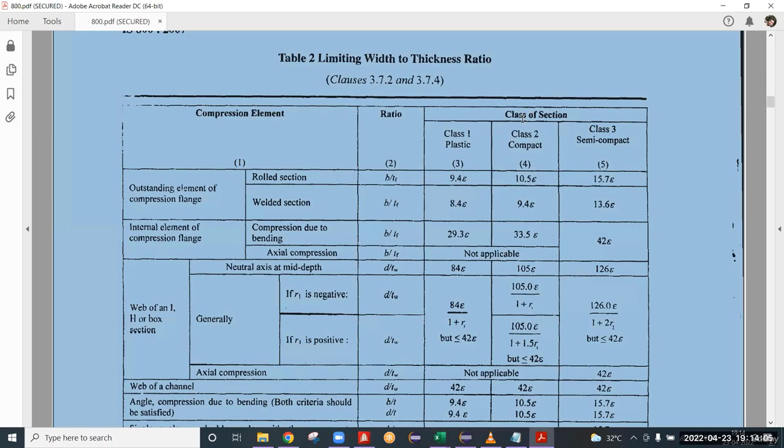My screen is visible to you? Yes, sir. Okay, fine. I am taking a new structure. Just give me a name. Indian code mezzanine frame. Okay.

Last time we discussed and agreed that I'm going to take you through all the different types of structures, that is regular frame, mezzanine frame, crane beam along with frame, flat roof frame, and 3D structures. For each structure I want to use different codes so that all the codes and all the types of structures will be covered.

That is why last time we have seen design using AISC code, and now I am sharing design using IS code, and this frame is with mezzanine. For this purpose, I want to take one example. Okay, fine. Let me take this example. You are seeing my screen, right?

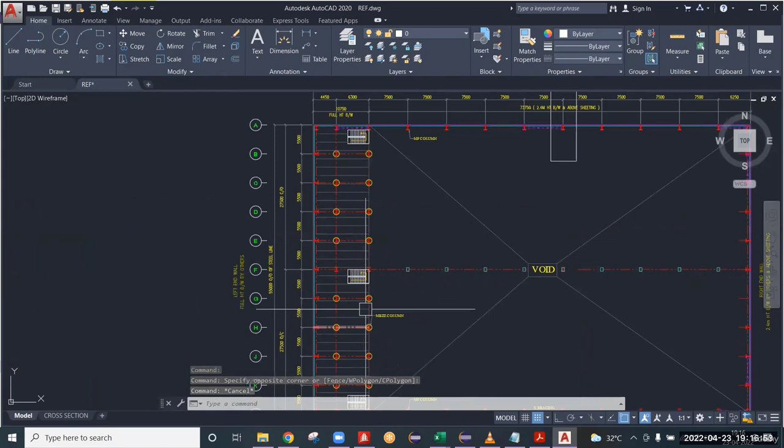Yes, sir. This is the 55-meter wide building and 84.5 meter length building, and I am taking a mezzanine frame. That is why I am taking grid line 2 in order to explain a frame with mezzanine. So can anyone tell, what is the tributary width for grid line 2? My screen is in front of you. It is a simple thing. Try to answer.

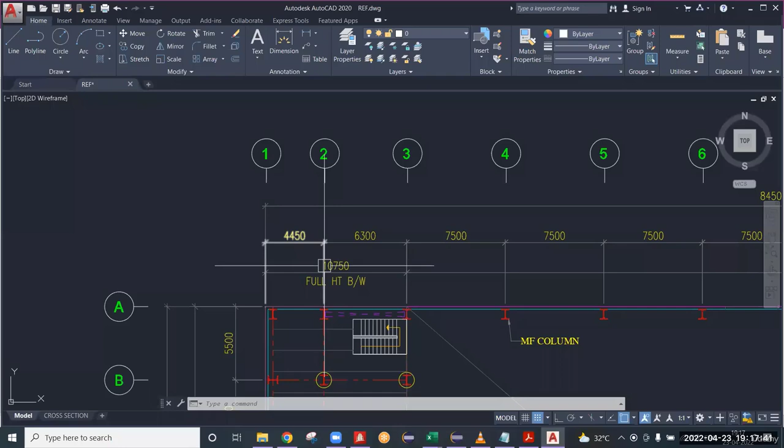So many sessions happened. 6.3. 5.375 meter. 6.3 plus 4.45 divided by 2. 5.375, right? Yes, sir. So make sure to remember this. I am going to take this frame in the design. What is the width here?

55. I just want to assume that the block wall thickness is 200 here, and here also it is 200. So overall 55 meters minus 400 mm block wall, and STAAD will do design along the center line only, right? That is why you have to assume the center line of the column at the base. Suppose the base depth of the column is 300. So what will be the center line? 150. So one side it is 200 plus 150, and the other side also 200 plus 150. Is that clear to all of you?

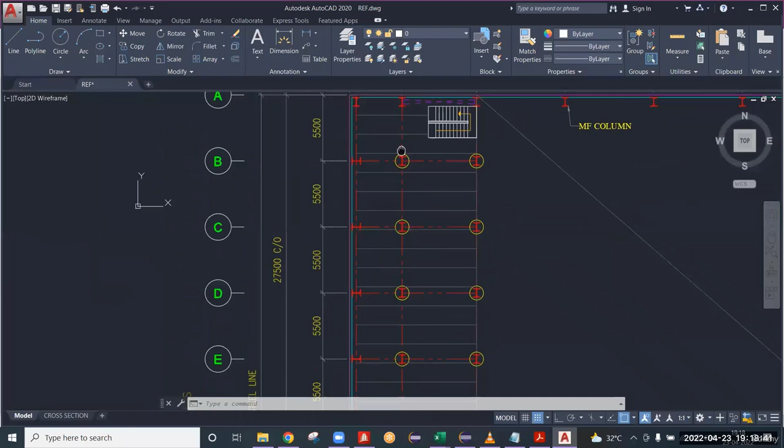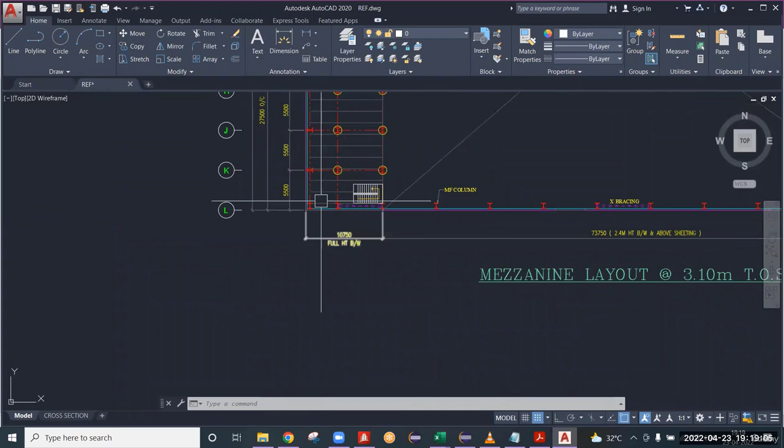I am assuming that my base depth of the column is 300. So what about the center line? It will be passing through the center of the web. So 200 block wall plus 150 center of the column, 350 on one side, and on the other side also 350. So in order to give perfect geometry in STAAD, what do you have to deduct from the actual width? 55 minus 0.7. Do all of you agree with me?

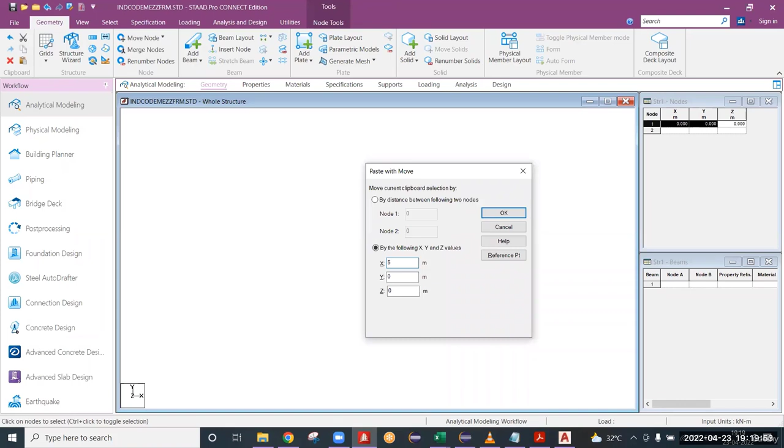Yes, sir. Right. So 55 minus 0.7 gives you 54.3. So I am giving the first node here. Before giving the second node, I am changing the view to front view so it is easily visible. I'm selecting the first node, Control C, Control V. You have to give the X distance for the second node, that is 54.3. So these grids are created, A and L.

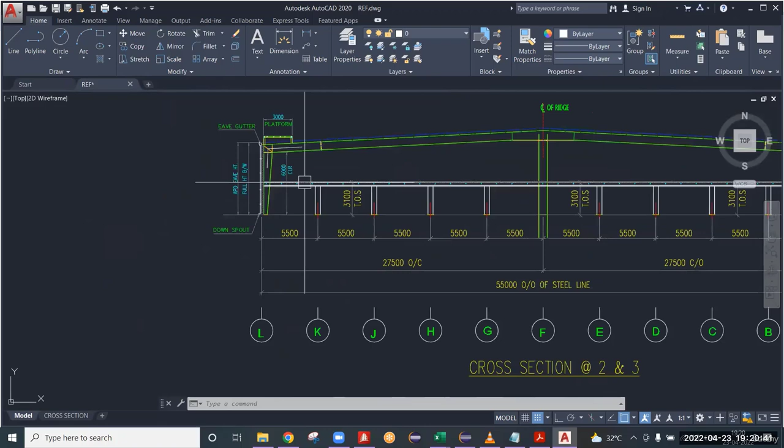Now you have to give the height. What is the height of this building? For example, the customer has given 6 meter clear height. So what is the module? Module means clear span between the columns. So what is the module here? 27.5. Based on that, you have to assume the maximum rafter depth at the haunch portion. Suppose I assumed it as 800.

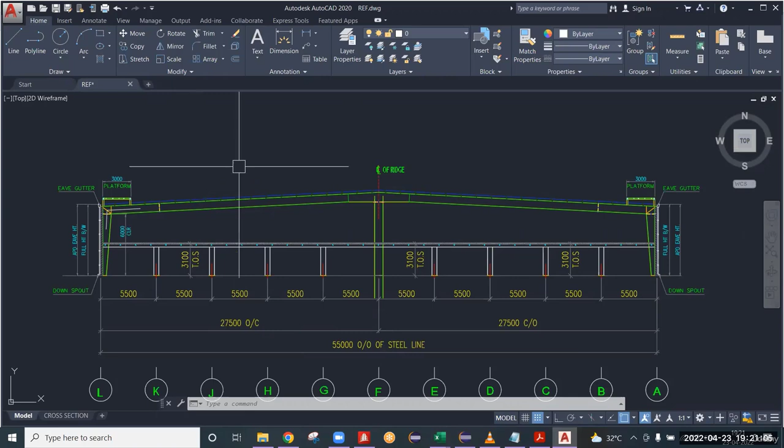Again I'm telling you, whatever you design in STAAD is all a trial and error process. You have to give some value and check whether it is passing or not. If it is passing, then okay. Otherwise, you have to change the section in order to pass, right? So I am assuming the depth of the rafter is 800.

So what is the center line for me? 400 from the top of the rafter. He has given 6 meter clear. Clear means bottom of the rafter. I am assuming 800 depth of rafter, so 6 meters plus the center line 400, right? For an 800 rafter, the center line will be 400. So 6.4. Do you guys agree with me?

Yes, sir. So Control C, Control V. I am giving height of 6.4 for 2 nodes. Okay, these 2 nodes are pasted at a height of 6.4 meters from the base plate level.

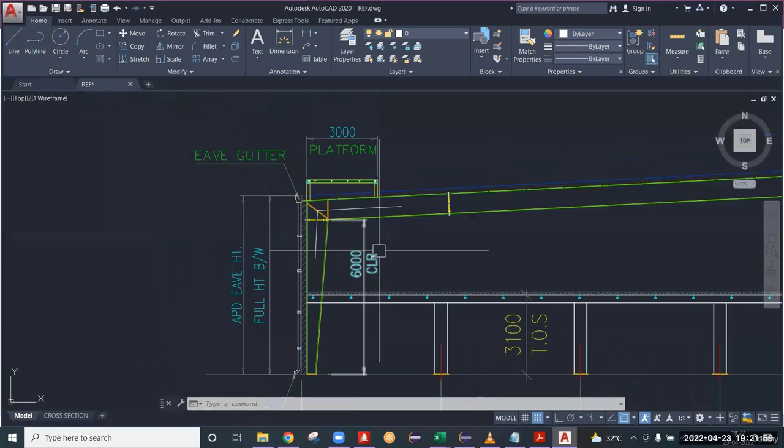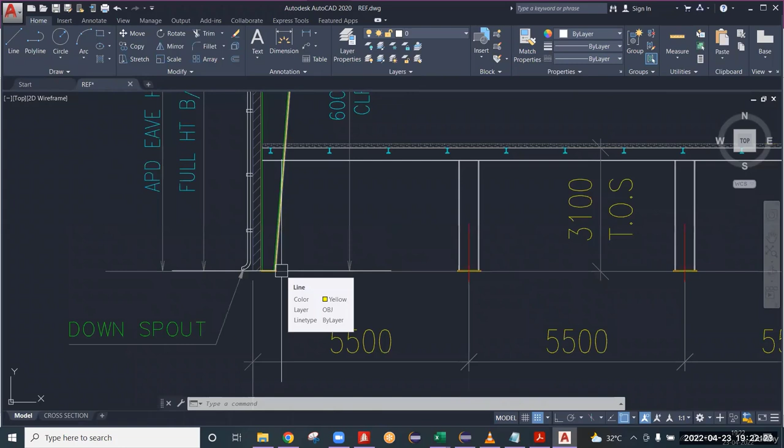And the thing is that there are certain columns here. If you observe, there are some columns here. So I want to take these columns in STAAD. So this is 5.5. Already we have deducted this 200 plus 150, right? So that is 0.35. 5.5 minus 0.35 gives you 5.15 for the first column. 5.15.

And if you observe, all these columns are at a distance of 5.5 meters, right? 1, 2, 3, 4, 5, 6, 7, 8 columns at a distance of 5.5. So there is one command I already told you in the basics of the STAAD session. First you have to select the node, and then there is a particular feature, translational repeat.

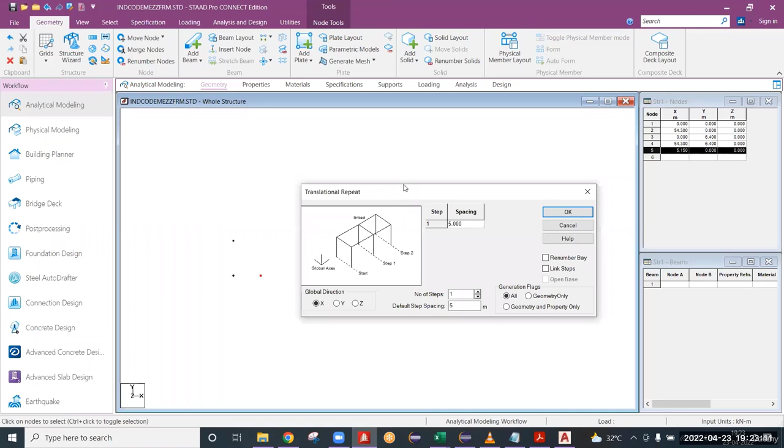Translational repeat is a feature that can repeat the node at a particular distance given by you. So I want to repeat the node in the x direction for every 5.5 meters. I have selected one node and taken this feature. I have selected x direction. My default step spacing is 5.5 meters. How many steps? 8 steps. And click on OK.

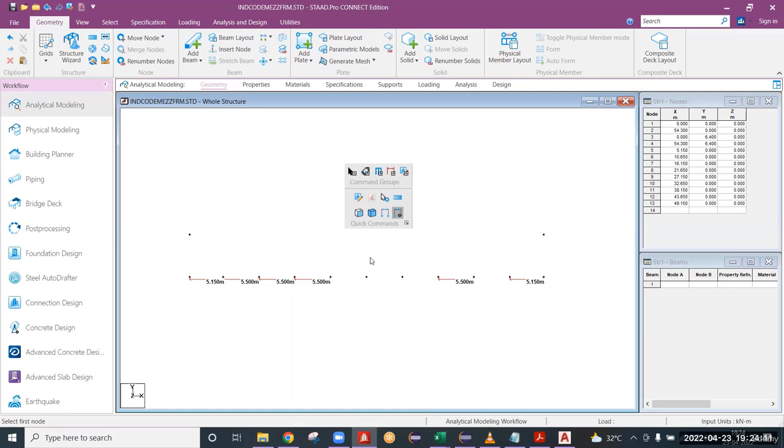If you observe, I have produced nodes at every 5.5 meters. Check this. Here also. And the last one will be again 5.15 because we have deducted 150 for column and 200 for block wall. Right? That is 5.15 for both these. So it has completed. Now you have to give peak height. Peak means this is the one.

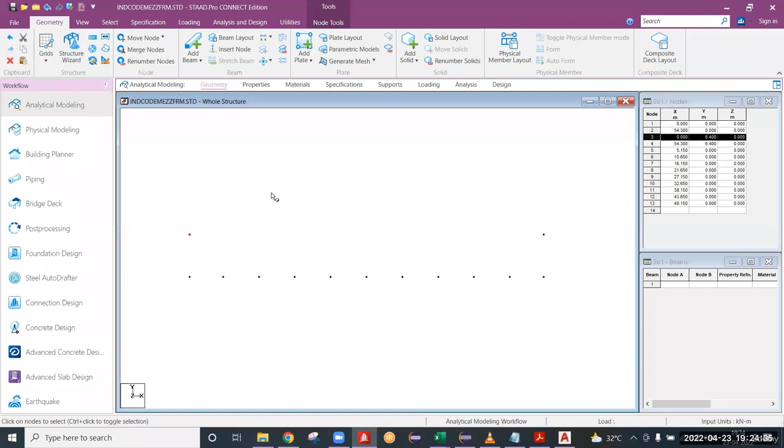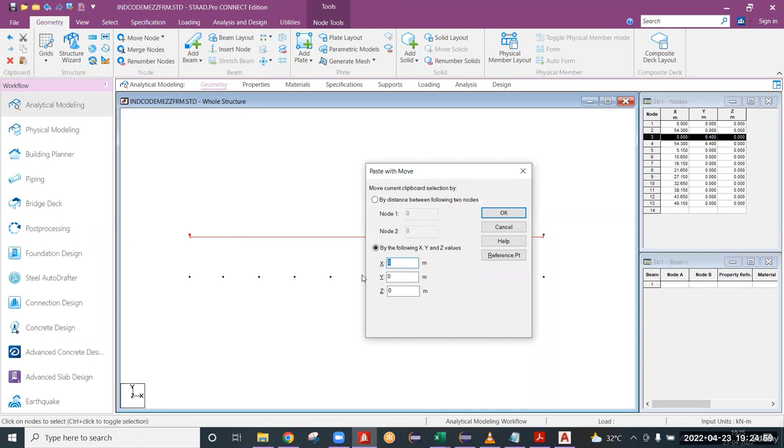So has he given anything here? No. So I am taking the roof slope as 1 in 10. So what is the distance between these nodes? It is 54.3. For a symmetrical ridge, where will the ridge be located? 54.3 divided by 2 gives you 27.15. So I am selecting the node cursor, selecting the node, pasting the node. Control C, Control V. At what distance? 27.15. I am assuming it as a symmetrical ridge.

And if I assume it as a 1 in 10 slope. Sorry. Anyone have any doubt? No? It will be a rise of 2.715 meters. Yeah. 2.715. Right. That is the rise. This is the rise and this is the x distance. If you click OK, you can observe the node is created here.

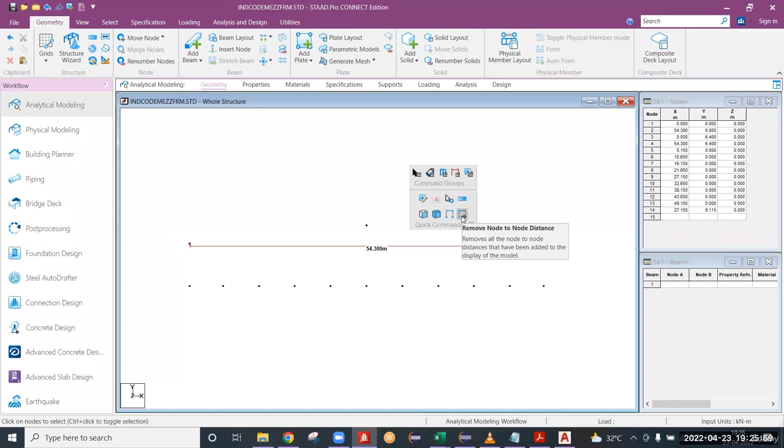The x distance between these two nodes is 27.15 and the y distance between these two nodes is 2.715. That is 9.115 minus 6.4, which is 2.715. The node is created here. I'm displaying all these dimensions.

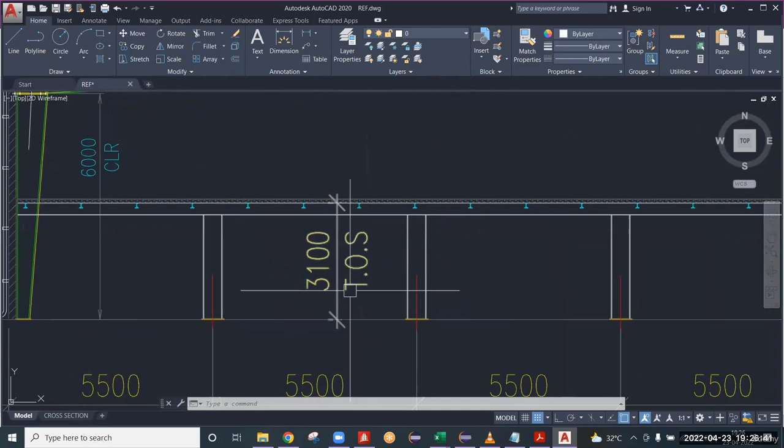So geometry is created, and one more thing left is you have to give the mezzanine at a particular height. If you observe, I have taken 3.1 TOS. 3.1 TOS means 3.1 height, top of steel, that is top of mezzanine beam. These are mezzanine columns. The horizontal one you are seeing is the mezzanine beam. Here the customer has a requirement of 3.1 top of steel. Top of steel means top of mezzanine beam.

I'm getting some disturbance from some of you guys. Can you please mute yourself? Okay, clear.

So this is 3.1 from the base plate level. So I'm just taking all these nodes, Control C, Control V. Before pasting the nodes, what should I do? I'm taking a calculator here. So 3.1 is the top of steel minus, if you assume, what is the beam span here? 5.5. So based on experience only you will get these assumptions, whatever the depth may come for this span.

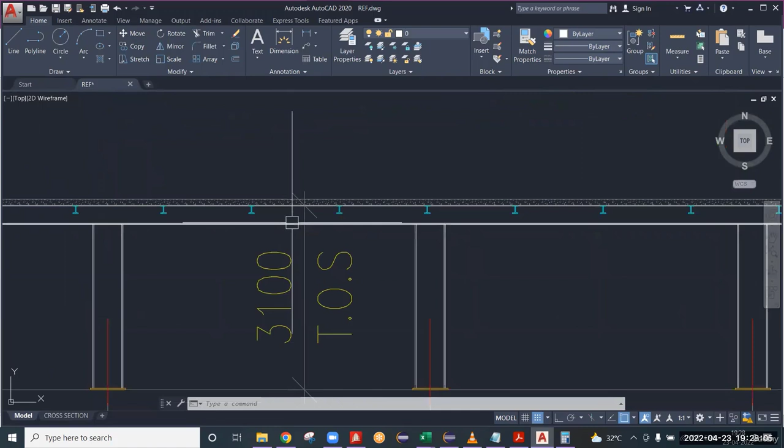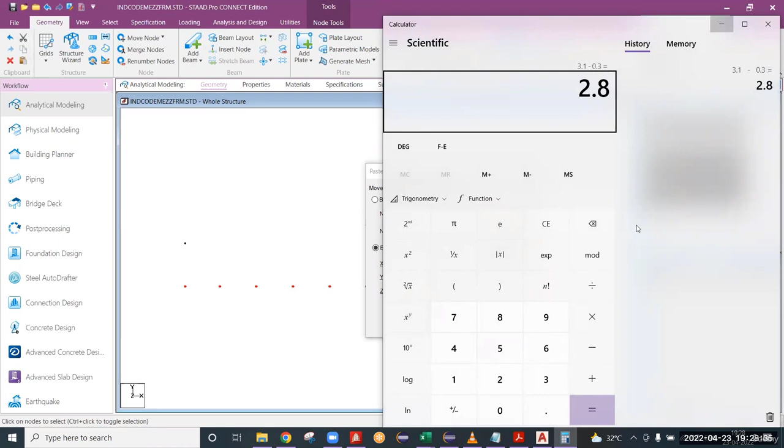For 5.5, generally the mezzanine beam depth may be around 600. Let us assume the depth of the mezzanine beam is 600. So 3.1 minus 0.3, because STAAD takes center line dimensions. If the beam depth is 600, you have to give 3.1 minus 0.3 for the center line. 600 by 2 is 300, so you have to deduct that 300 from TOS. 3.1 minus 0.3 is 2.8. So I am copying these nodes at a y distance of 2.8 meters.

So I have produced all these nodes. So it is completed. Now I am taking add beam feature here. So I am joining these nodes, because in any PEB you have to divide the rafter into particular number of segments so that you can optimize much more.

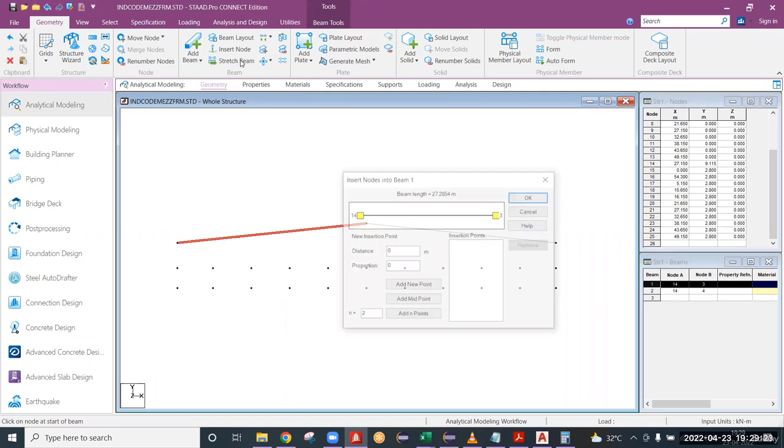Okay, in order to divide the rafter into particular number of segments, I have selected the rafter, and there is one option called insert node feature. Okay, insert node feature. So this is generally what we have seen. Generally any company prefers to divide the segments in the multiples of 3.

Okay, divides the rafter in the multiples of 3, because some companies may follow 9 meters transportable length, some companies may follow 12 meters transportable length. All these numbers are in the multiples of 3. So most of the companies will follow the segment in the multiples of 3. So that is why I am taking multiples in 3.

First one is 3, second one is 6, 9, 12, 15, 18, 21, 24. So actually what is the beam length here? It is showing 27.2864. So you have given up to 24. So what will be the next number? It is 27. Already there is 27. So no need to give. Click on OK. So you can see this rafter is divided into number of segments. So you can see different nodes are created along the length of the rafter.

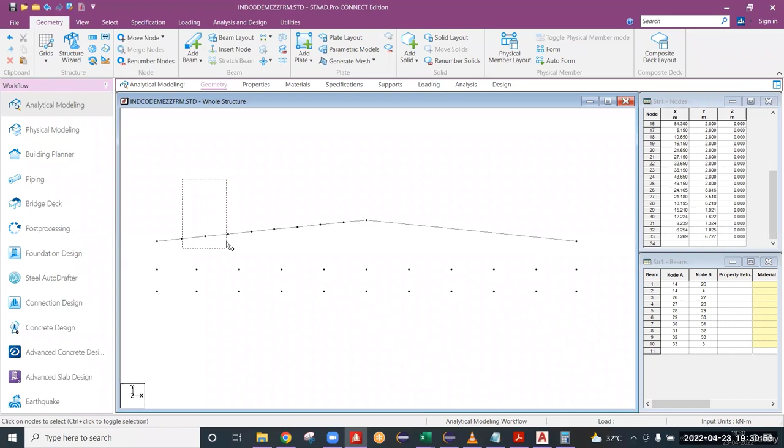So there is one more feature, because this is a symmetrical frame, you can mirror these nodes on the other side. So whatever the nodes you want to mirror, you have to select the nodes, and there is one option here, you can see mirror. Okay, if you click on mirror, which plane you want to mirror, it is asking. So the nodes is here, so the mirror line will be like this. What is the line here? YZ plane. So you have to select YZ plane.

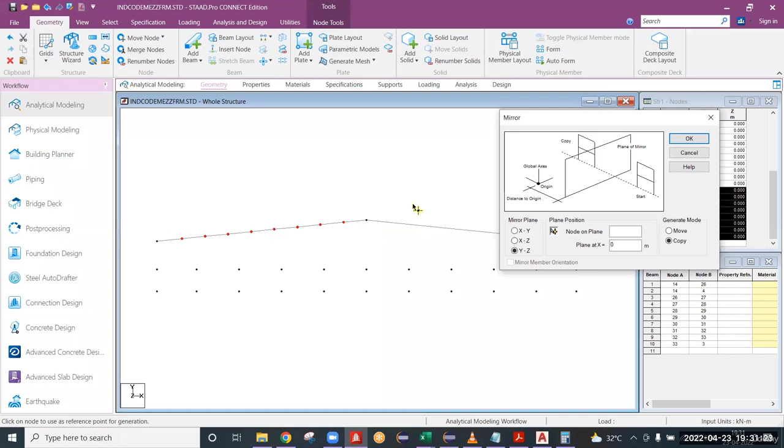And along which node you have to mirror. So this is the center node for these two lines, these two rafters. So I am selecting that one, and if I click on OK, the nodes on the one side will be mirrored to the nodes on the other side. Is it clear to all of you?

Yes, clear. Okay. I am deleting all these beams. It is asking 18 beams and associated physical beams, if any, will be deleted. Click on OK. It is asking if you want to delete the nodes. No, I want the nodes. I have deleted the beams because I want to give the beams in a particular number. Okay, if you want, you can do without the number. That is not a problem.

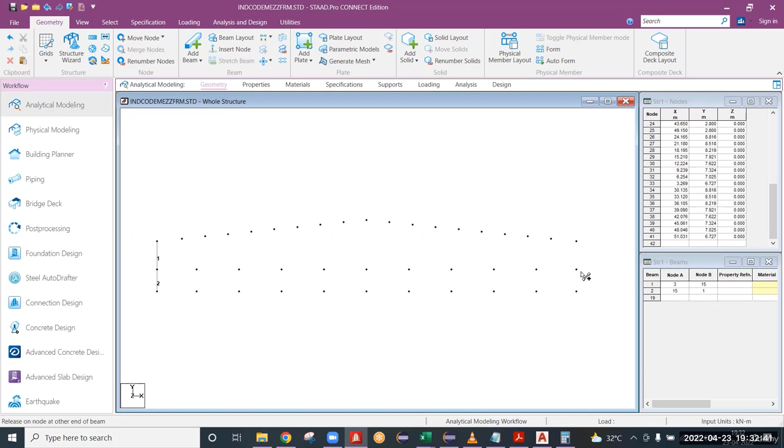But I want to go through a particular ascending or descending order according to the number wise. Okay, that is why I have deleted the automatically created beams. I want to give it by my own. Okay, so I'm adding the beams by using add beam command. So if you want to see the beam numbers, the command is Shift B. You can see the beam numbers here. Okay, 1, 2, 3, 4. Columns completed, and I'm joining the rafters 5, 6, 7, 8, 9, 10. Sorry.

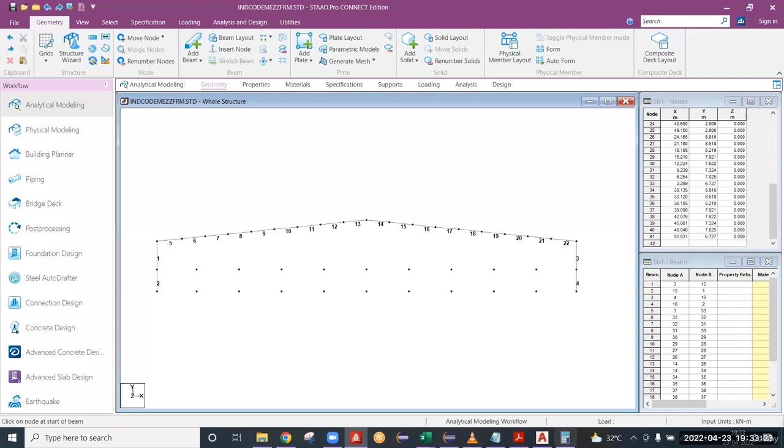Okay, then we go to the cross section. So we have created beams along columns and rafters. Now what is the remain here? One center line, that is BC column, is remaining, and mezzanine beams and mezzanine columns. So this is the BC column.

BC column completed. In mezzanine columns, these small columns are called mezzanine columns because they are supporting only mezzanine, not the complete structure. Okay, so these are not mainframe columns. These are called mezzanine columns. So mezzanine columns also completed. Now there are mezzanine beams. Now is it clear to all of you how to model a frame? It is okay. Now I am going through the next process.

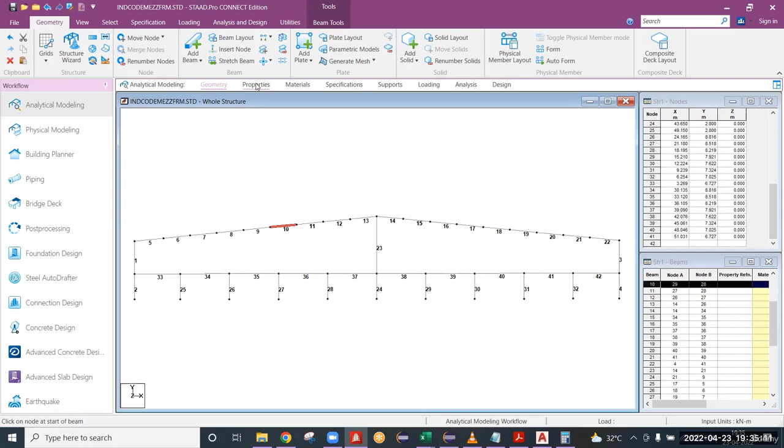So generally most of the structural engineers will prefer the method by using STAAD editor. Okay, why STAAD editor method is preferable? Because you can change the dimensions easily. Suppose if you want to change the properties of this beam, you have to double click, go to the properties section here, and you have to change the database here. All these are very lengthy process. But if you have STAAD editor, directly you can change the numbers by typing. That is why most of the structural engineers prefer to use STAAD editor method. So make sure and be habituated to the STAAD editor method.

It is very simple, not at all difficult. Actually, here anyone can do it. You can give the beam command, you can give whatever specifications directly. All these are visible. Anyone can give them; no need to be a structural engineer actually. So if you want to be a perfect structural engineer, go to the STAAD editor. If you habituate to the STAAD editor, you will experience that it is simple.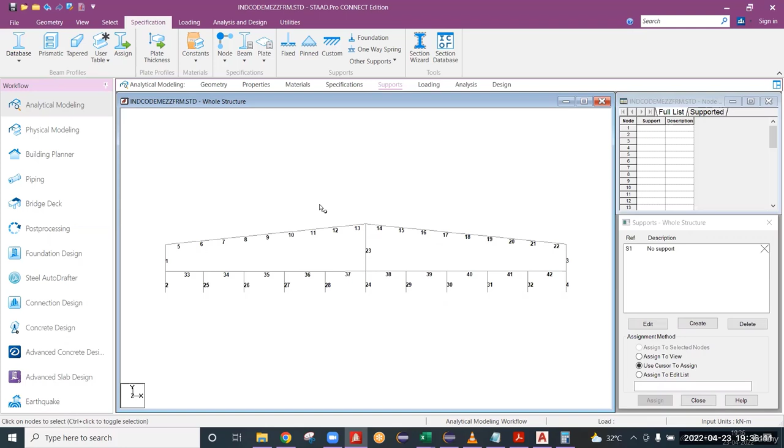So just before going to that, I am assigning the material steel to the model, whatever I have modeled here. So I am going through the STAAD editor. STAAD editor symbol you know, right? Paper and pencil symbol is there at the top, or otherwise you can create it in the space shortcut. In the STAAD basics itself, I told you there are certain shortcuts available.

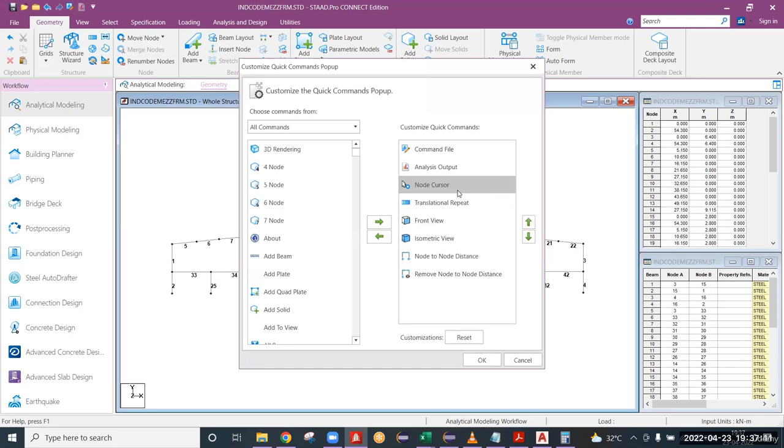If you are in the user interface and you click the space button, certain shortcuts will open here. If you want to change the shortcuts as you wish, there is one shortcut here, customize quick commands. If you click that, whatever you need, you can move to the right side. Whatever you don't need, you can move to the left side. If these are not visible to you, go to the analysis.

Or otherwise you can create here the analysis command file. Generally this is called the command file. The paper and pencil symbol, that is the command file editor. If you roam the cursor on this, you can observe this is the command file editor. If you click this, automatically it will come at the top. So by using that also you can enter the STAAD editor.

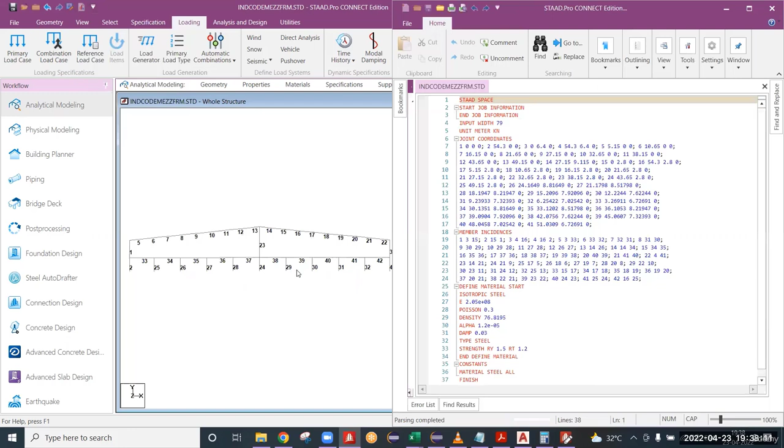The first thing you have to do is check whether you are doing a space frame or a 2D frame. I am doing a 2D frame. Generally all the PEB companies prefer to use 2D frames because 3D frames are time taking. So what is the advantage of 2D? If you do 2D and there are similar frames available, you can multiply the number of frames and estimate like that. That is why most PEB companies do 2D frames only.

So if you do 2D frames, what is the command you need to give here? Can anyone guess? Last time we have seen. Plane. Yes, exactly, plane. This is the one you need to change because we are doing a 2D structure and the loads will be applied along the X and Y directions only. There is no structure along the Z direction and no loads applied along Z. That is why it is going to be a plane frame, that is a 2D frame.

I have done this, and if you observe, the default units created here are meter kilonewton. Generally while configuring STAAD Pro, if you have newly installed it in your system, it will ask directly whether you want to use English units or metric units. English units means pounds, inches, etc. So I have selected metric units, that is why it is coming meter and kilonewton by default here.

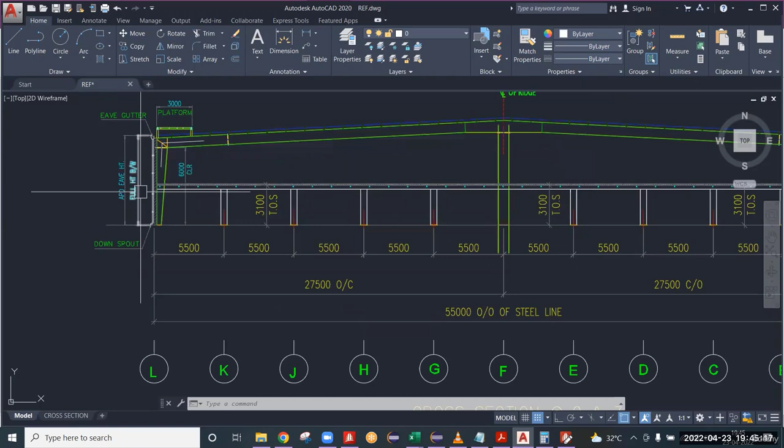LY means unsupported length along the minor axis, UNT is unsupported length of the top flange, UNB is unsupported length of the bottom flange. All these depend upon the support conditions, from where the column takes support, whether beside it there is block wall or sheeting. If there is sheeting, we need to provide secondary members like girts. So girts will provide some sort of support to the column.

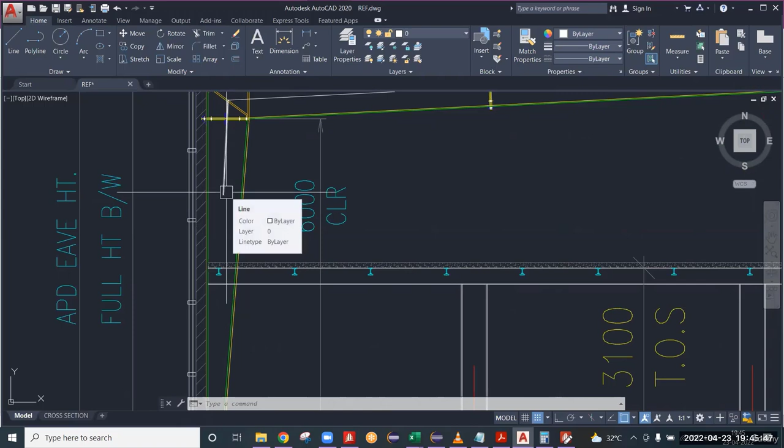But in case of block wall, it will be leaning over the column itself. Because of that, it will not provide any support to the column. Block wall itself will take column support, but it will not provide any support to the column. If girts are connected to the column, they will provide some sort of support, but there are no girts here. So what will be the LY, UNT, UNB, we will see here.

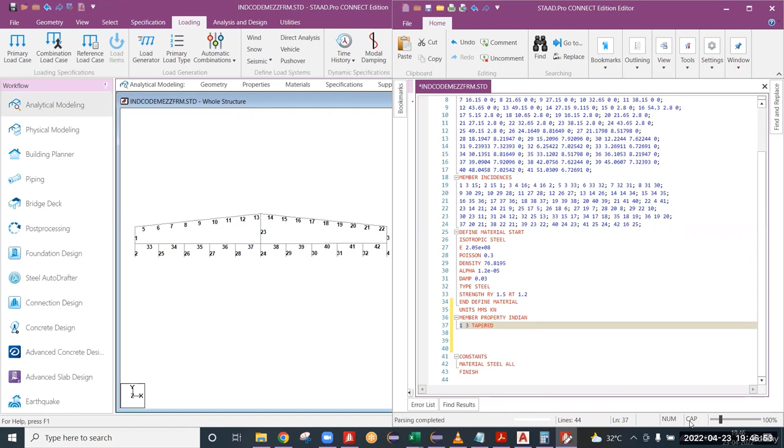So because the frame is symmetrical, I can give the same properties for both side columns. Means 1 and 3 will have the same properties, 1 and 3 tapered. So all these things we have to assume. You'll get all these things based on experience, because whatever we do in STAAD is a trial and error process. I'm again telling you, STAAD will not design by its own. You have to give some section, it will check whether it is passing or not. That's it.

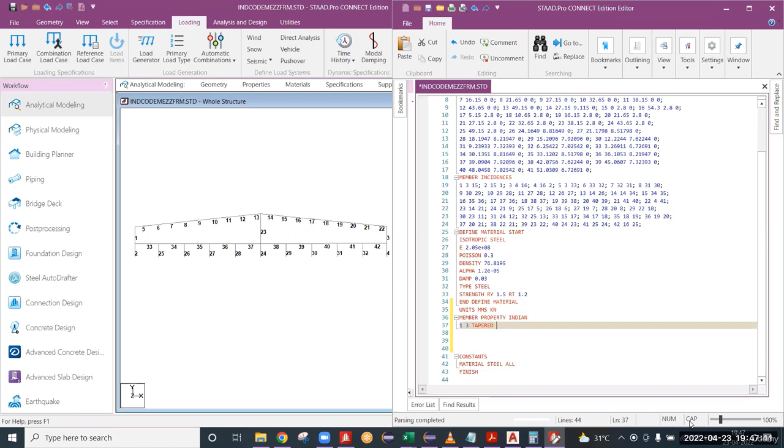So I'm giving 800 at the top. At the top of the column it has 800 depth. So if the web has 800 depth and, assume, the flange thickness on either side is 10, 10, what will be the overall depth of the section? 820. Suppose let us take web thickness as 6, and the second depth.

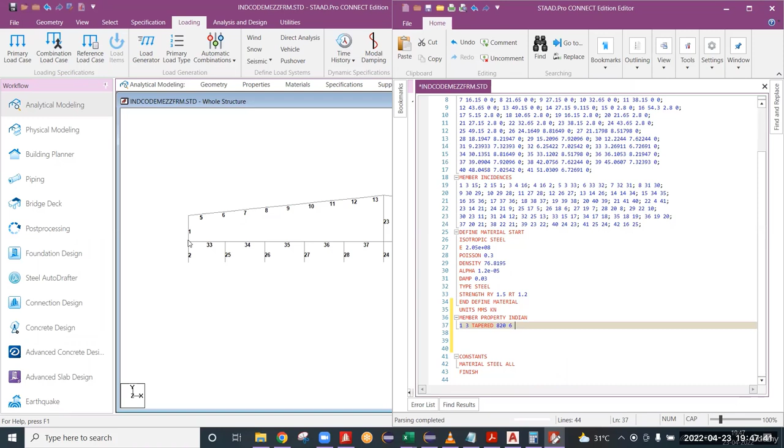Second web depth. This is the starting web depth or first web depth. This is the ending web depth or second web depth. If you roam the cursor over a particular beam or column, it will show green and blue lines. Green will be the starting point and blue will be the ending point of the beams. So 820 will be the starting point, at the green portion. The next depth you give is at the ending point of the beam, the blue portion.

Suppose there is 520, 520 second depth. So overall depth is 520. Outside column flange width is 200 and the thickness is 10. Inside column flange is 200 and thickness is 10. Clear? 2, 4.

So what will be the starting point of 2? Whatever the depth at which 1 has ended, 2 will start there. It has ended at a web depth of 520, so it also has to start at the 520 depth, right? Suppose 320 at the base. We have assumed this, right? 320 at the base, 200 outside flange width and 10 outside flange thickness, 200 inside flange width, inside flange thickness 10. So have you got habituated to this syntax?

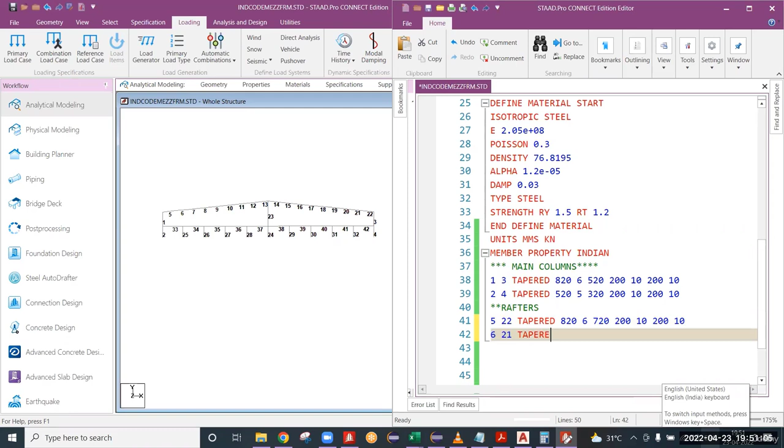So in the standard data, this is another flexibility, right? You can copy this syntax and paste it for another member. Suppose 8 and 19, right? Control V. Suppose this section is constant from here on. I can copy this syntax and paste it to every member having similar properties: 9, 18, 10, 17, 11, 16, 12, 15.

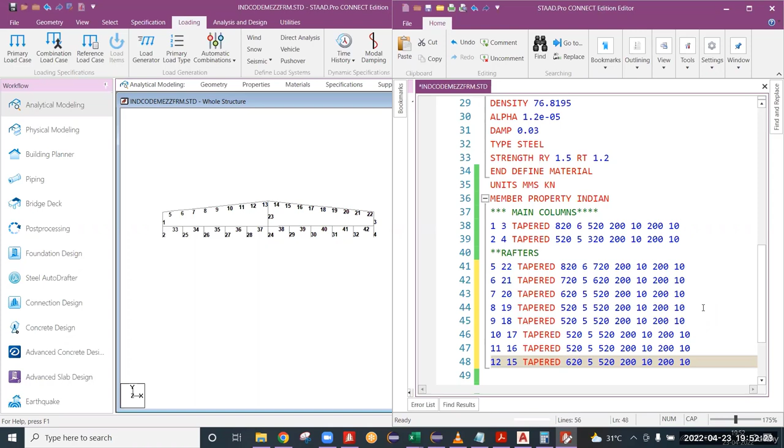So suppose here, 13, 14. Sorry. So here it has a starting depth of 620, so here it will get 620. And as I told already in the last class, 10% slope. Yes, exactly.

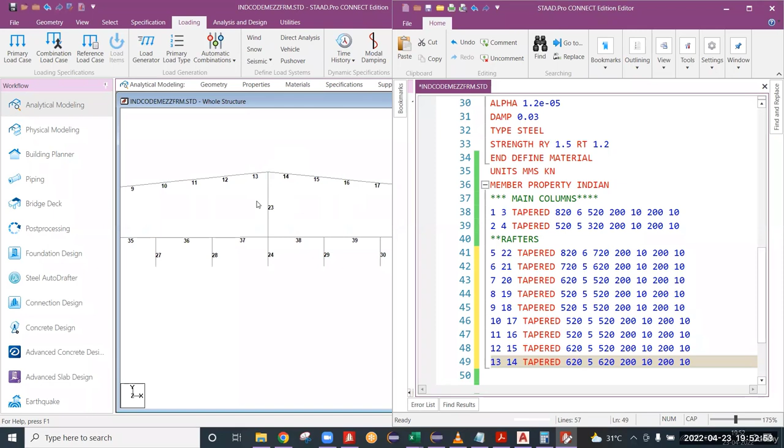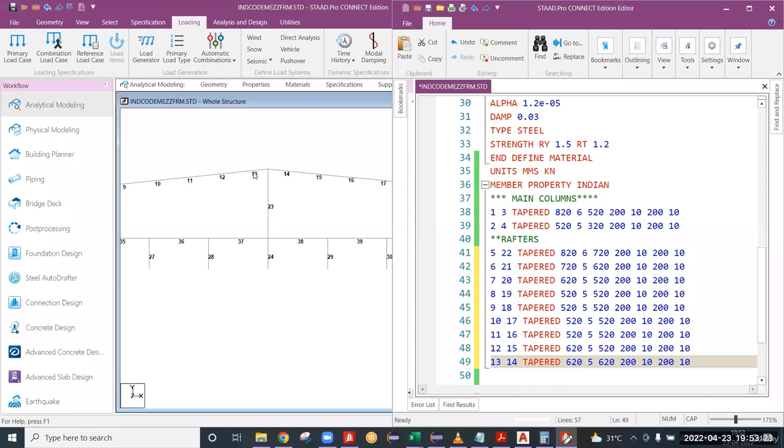So for the remaining people's understanding, generally this is the BC column, right? A BC column can be fixed or pinned at the top. But if you want a proper connection, to sit the BC column properly, the rafter has to be flat bottom. What is the length of this member? 3 meters. Roof slope is 1 in 10, you cannot change that, right? So to provide a flat bottom here, I have a start depth of 620.

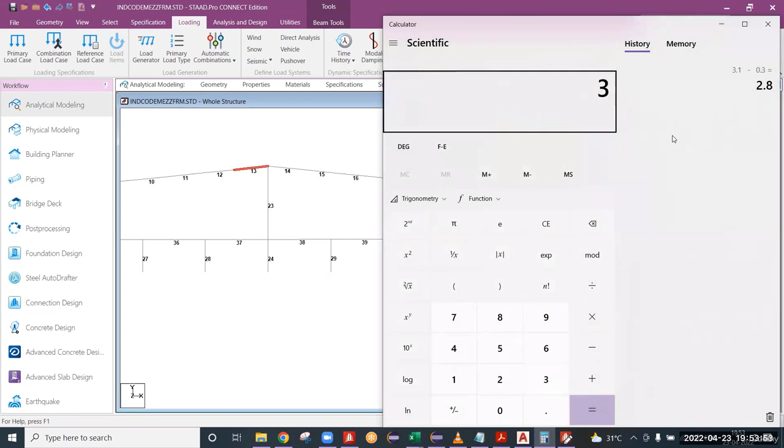So how do you have to provide the end depth in order to get a flat bottom? See my calculation. The member length of 3 meters into 1 in 10 slope, 1 by 10, gives 0.3 meters. Converted to mm, you'll get 300 mm. So only if there is a change in depth of 300 from the starting to ending point will you get a flat bottom. So I have a starting depth of 620. What depth do I have to provide here now? 920, right?

So how to change the thicknesses, all these things you'll get by practice. Okay. So here rafters are also completed. Now internal columns. I have 23 tapered. Suppose 420 depth of column is there. Okay, 420, 5, 420, 200, 10. Okay, 24 also tapered, 420, 5, 420, 200, 10.

Then you will get a doubt actually. So sir, why have you given 23 and 24 separately? Because of the mezzanine, I think. Yes, exactly. Because of the mezzanine, the bottom section, nothing but 24, may need a higher section than 23. Okay, I have assumed this section here. After the analysis, you will get to know whether this section is sufficient or not. Anyway, 23 will not need this much section, but 24 might not pass with this section. That is why I have given two different properties here for 23 and 24.

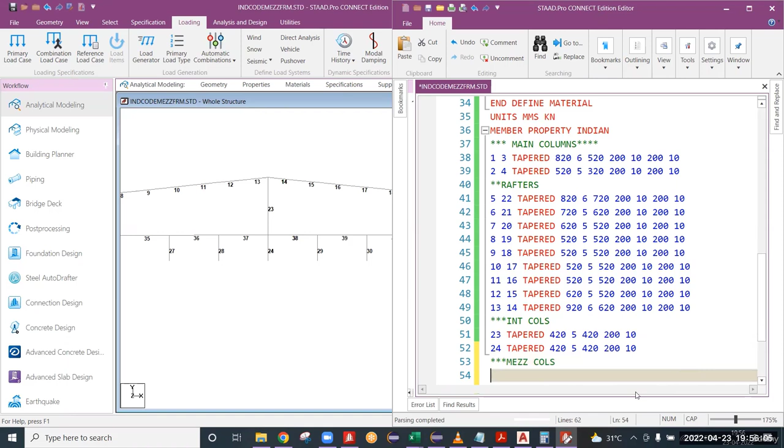Now internal columns completed. I want to give mezzanine columns. So why am I telling you like that? If you go in numerical order, then you will not miss any section. If you observe, 1, 2, 3, 4 completed here, 5 to 22 completed here, the next thing I have is 23, 24. This is the advantage. What is the advantage of doing like this? You will not miss any section. Okay, so I have completed 23 and 24. So from 25 onwards, mezzanine columns will start, right?

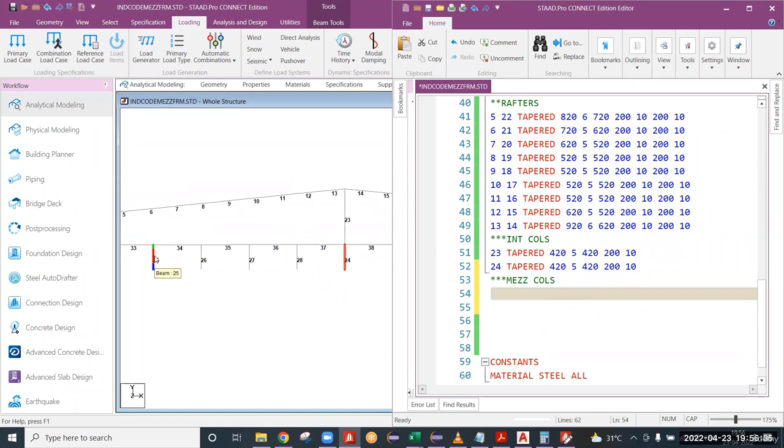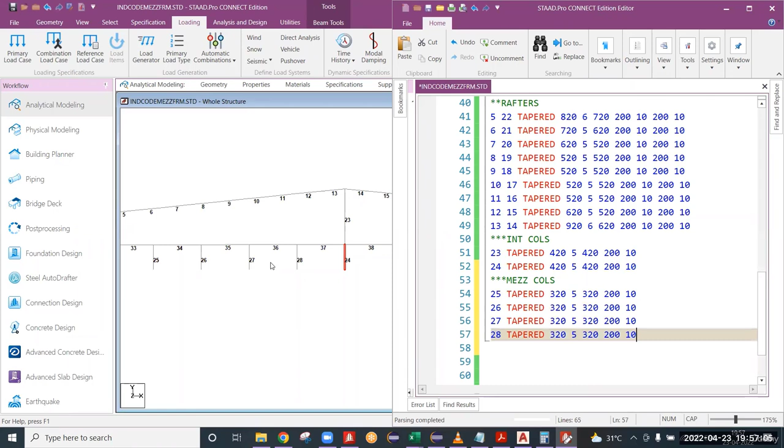So 25 tapered, suppose 300. 325, 320, like this. So Control C, 26. Sorry. Right. So if you observe, 29 will be the mirror of 28, 30 will be the mirror of 27. So all these sections can be similar. 28, 29, 27, 30, 26, 31, 25, 32. So mezzanine columns have been completed, and now it is up to mezzanine beams.

So what is the depth of the section I have assumed at the time of modeling? It is 600, right? Mezzanine beam depth I have assumed as 600. That is why I have deducted 0.3 for the center line in order to get the mezzanine beam in STAAD, right? 33, 42 have similar properties. This is just an assumption, just to give a demo to you, all these sections are with 210. Actually, this much section is not necessary. You will get optimization anyway.

34, 41, 35, 40. This is the advantage of the STAAD editor. You can copy and paste directly. 37, 38. So any sections remaining here? No. So all are completed.

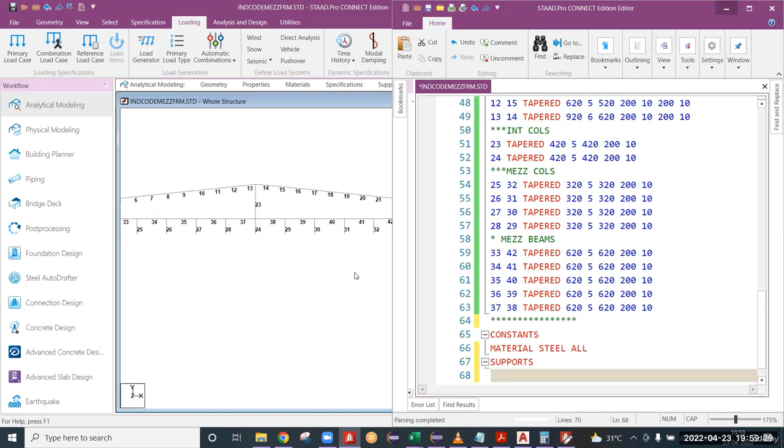So if all are completed, then what is the next step? Support. Yes, support. So already we have constants here. After that, supports. Sorry. So in order to give the supports, you need node numbers. What you are seeing now are beam numbers. If you click Shift B again, these beam numbers will disappear. If you want node numbers, you can click Shift N.

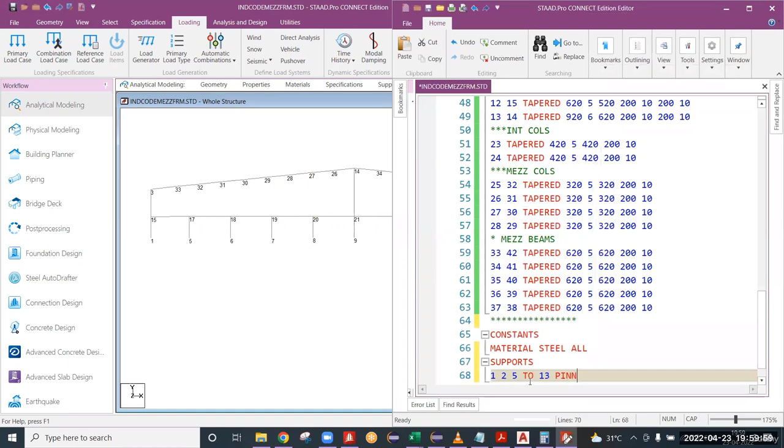So 1, 2, 5 to 13. Right? 5, 6, 7, 8, 9, 10, 11, 12, 13. 1, 2, 5 to 13. What is the support I'm giving here? Pinned support I'm giving.

And after that, actually, what is the default unit here? Meter kilonewton. For my convenience only, I changed the units to mm kilonewton. Now, giving the section properties has been completed, so I'm returning to the default units. Okay, units meter kilonewton. Now, what is the next step we need to give? Earthquake? Yeah, particularly loads. Simply loads, right?

So loads. Generally, we have seen different types of loads on a PEB. Earthquake loads, and gravity loads like dead load, live load, any other collateral load. In the Indian code, there is no particular definition for collateral load. Dead load and live load come under gravity loads, and then you have wind loads. Actually, for temperature, we don't have any particular load combination in the Indian code design.

What will happen in practical cases if the customer wants to consider temperature load? By default it will be 27 degrees Celsius. So what is the partial safety factor for temperature? It is the same as dead load. Suppose your dead load factor is 1.2, the same will be applied to temperature also. So practically we provide it like that. But when will the temperature load actually matter?

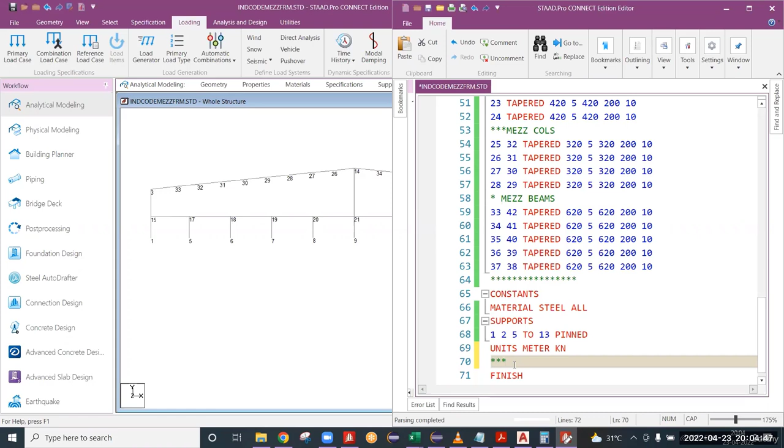Generally, if you consider temperature load also, that will not show any effect. Unity check ratios will not change much. Suppose you got 0.9 without temperature load. If you apply temperature load, that may change to 0.901, nothing but 0.001. That is why in Indian codes, temperature loads may be neglected if the customer has not asked.

So I'm going to start taking loads here. First of all, what is the load I have to give? Before going to the loads, you have to define the seismic specification. So what is the seismic specification we have in India? 1893. Yes, exactly. So that is the same thing I'm defining here.

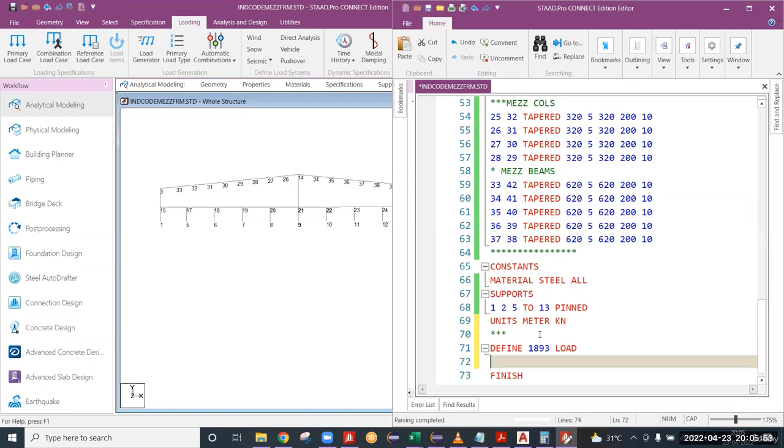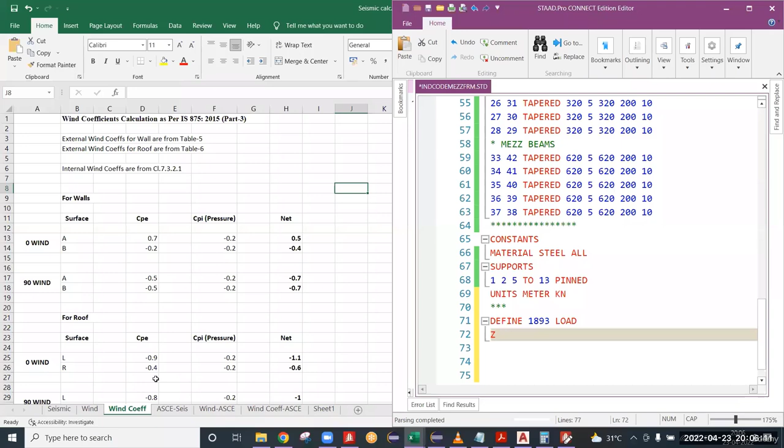Define 1893 load. There are certain parameters I'm going to write here, and I will explain all these things. The first one is Z. Z is nothing but zone. We have seen seismic calculations in the previous classes, so I'm going to take the same data. What is the zone factor? Already you have seen in the seismic calculations, the seismic zone factor is 0.1.

This is the example I am taking. This is based on the location, from IS 1893 table 3. If you go through table 3, you'll get the zone factor for different locations. The zone factor is 0.1 here, and the same thing I'm mentioning here.

And the next thing, RF. RF means response reduction factor. What is the response reduction factor we got in our example in the previous class? We got 3. The same thing I'm taking here.

And the next thing is importance factor. All the things I have in my data, I have given one Excel sheet to all of you. So the same thing, importance factor 1. If you observe the 24th line, importance factor is 1.

And soil class, SS is nothing but soil class. Generally in STAAD, the soil class is defined as: one is for hard rock, the second one is medium stiff, and the third one is loose soil. So based on the soil property, if I take medium soil, I have to give 2. 1 is for hard rock and 3 is for loose.

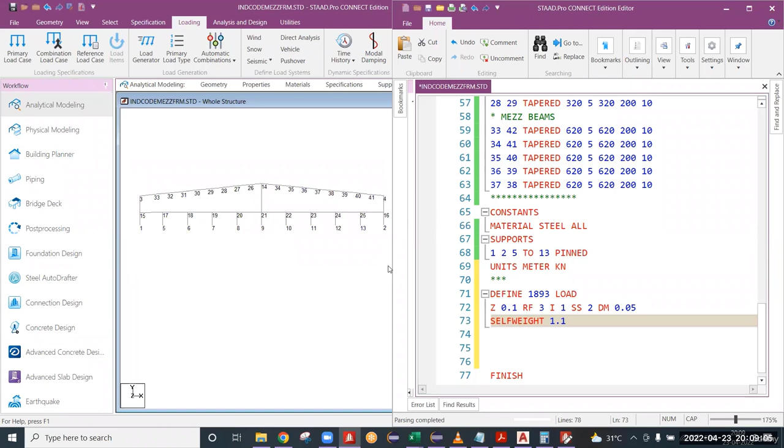Some people will follow a factor of 1, and some people will follow 10% extra, 1.1. Why? Because this is just a skeleton, only the frame. We will not have any girts, purlins, sheeting or any other accessories that we have in real time in STAAD. That is why practically some people will give 10% extra.

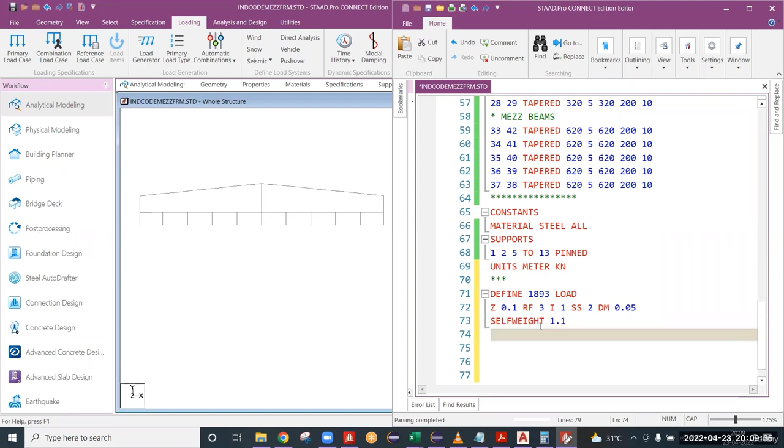Sorry. And the next thing, we have seismic weight. We have some formula here. So what we have: dead load plus some percentage of live load into tributary area. So dead load we have already seen. If you consider it for roof, generally the code will not provide any seismic weight percentage for live load. So you can directly give dead load into tributary area, because this live load percentage will be 0.

If you go through clause 7.4, that is seismic weight, there is no provision for roof live load. You have 25% provision for mezzanine live load, but there is no provision for roof live load. So the roof live load percentage share will be 0. So only dead load will govern there according to clause 7.4. So I'm writing the formula here also for your convenience.

Roof seismic weight is equal to dead load plus 0 into roof live load, RLL. For your convenience, I'm writing it like this: 0 into roof live load, into tributary length. So in our example, what is the dead load here? 0.3 plus 0 into 0.6, into what is the tributary? At the start of the class we calculated something like 6.3 plus 5.375. Yes, 5.375.

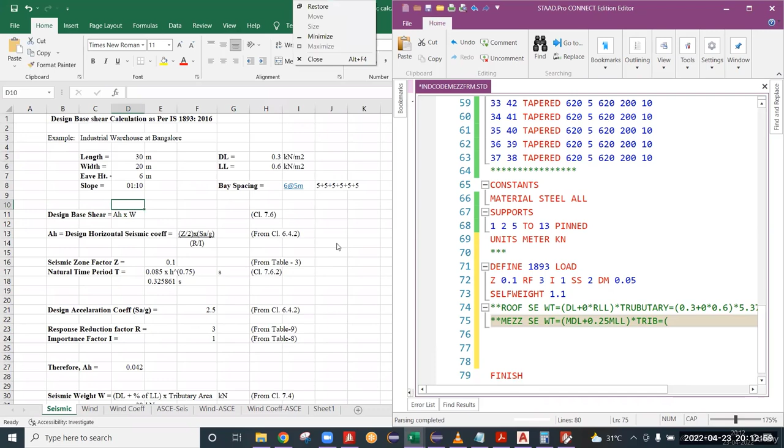into tributary. So mezzanine dead load, do I have any data in my example? No, I think I have not taken it in our example. So let us assume, since these are practical sessions, I can assume this one. Suppose mezzanine...

Sir, I have a doubt. Tell me. Sir, after defining the 1893 load, we are giving it to the structure. Why are we not giving any sign? Which one? Plus minus. Yes, this is a perfect doubt actually. Why am I not giving any particular sign? This doubt will be clarified just after this step. Just be patient till this step. I'll tell you why I'm not giving the sign convention.

I am assuming a mezzanine dead load of something like 4 kilonewton per meter square. Mezzanine live load is something like 5 kilonewton per meter square. So I'm applying these loads for mezzanine seismic weight. So dead load is 4 plus 0.25 into... Don't worry about all these loads. These will be given by the customer according to the occupancy, for what purpose he is going to use that mezzanine. Depending on that, the customer will give you all these loads.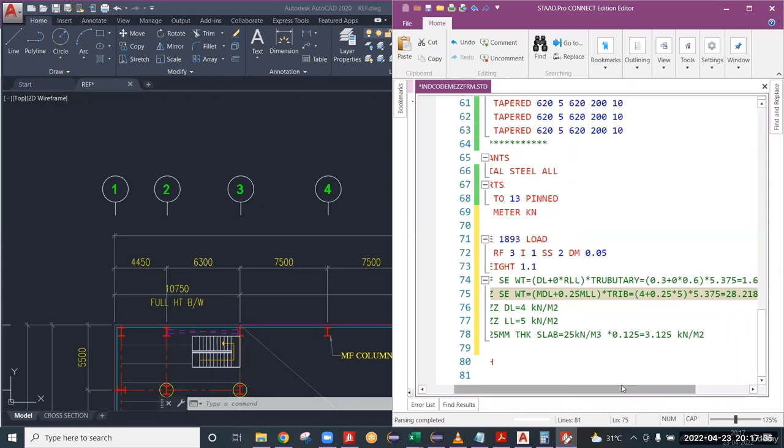4 plus, sorry. 28.21. Okay. Sorry, what? 4 plus 0.25 into 5 into 5.375. This is, yes, 28.218. Yeah. So this is how you have to calculate the mezzanine weights, right? After that, you need to give member weights.

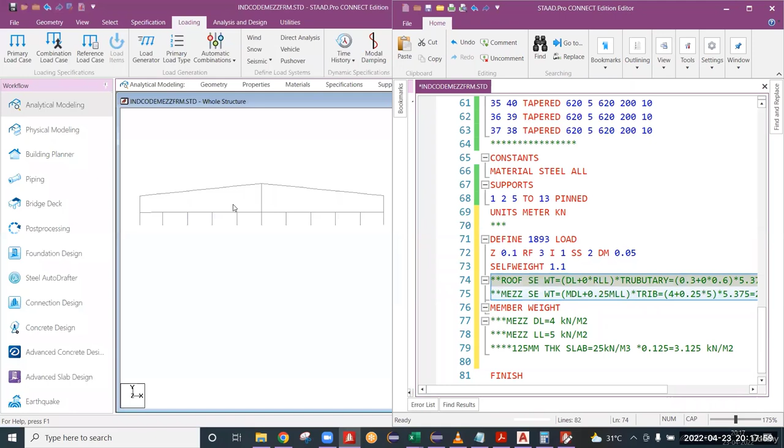So you have calculated this one. Now you are going to assign this to the particular members. So just concentrate on this. I am going to display the beam numbers here again. Roof seismic weight will be applied for rafters, and mezzanine seismic weight will be applied for mezzanine beams, right? So in the member weight command, I need to give only rafter members, that is 5 to 22.

Here also, you can observe, I'm not giving any direction, whether it is X, Y or Z. I'm not giving any particular direction of the load. I'm just mentioning the type of load. UNI means uniform loading; in simpler terms, it is a UDL. But I'm not mentioning the direction, whether it is negative Y, positive Y, negative X or positive X. I'm just mentioning the type of load and the intensity of load.

Because I'm taking the rafters, what is the intensity? 1.6125, right? And for the mezzanine beams, 33 to 42, what is the value? Intensity of the loading, 28.218. So till this it is clear. Why I have taken 5 to 22 here? Yes, clear. Thank you. So seismic definition has been completed. Now I am going to take primary loads. Load 1, I am going to take seismic positive X.

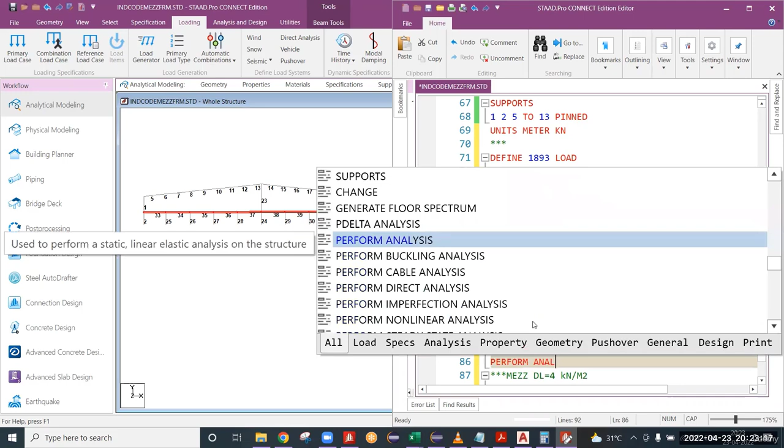That is why I have to perform analysis and end this load with this case itself. I'm starting a fresh load again. Load 2 seismic negative X. Clear? 1893 load, now X in negative direction, X minus 1. Perform analysis. Sorry, change. Right?

So this has completed. Seismic loads has been completed. Now load 3 is, so what is the next load? Dead load. Yes, dead load. Load 3 is dead load. So for the dead load, I'm just writing some notes for your understanding. This is, I can say, roof dead load. Whatever the value given to you by the client, you can use that value. Dead load I have is 0.3 here. Okay, this is all including sheeting and purlins.

Suppose let us take our example. So 0.3 into what is the tributary here? 5.375. So if you observe, this is in kilonewton per meter square in our example. So I'm multiplying it with meters. If you want, I can write here also kilonewton per meter square into tributary meters. So you are going to get UDL, right? 0.3 into 5.375, that is 1.6125 kilonewton per meter, right? So where it has to be applied?

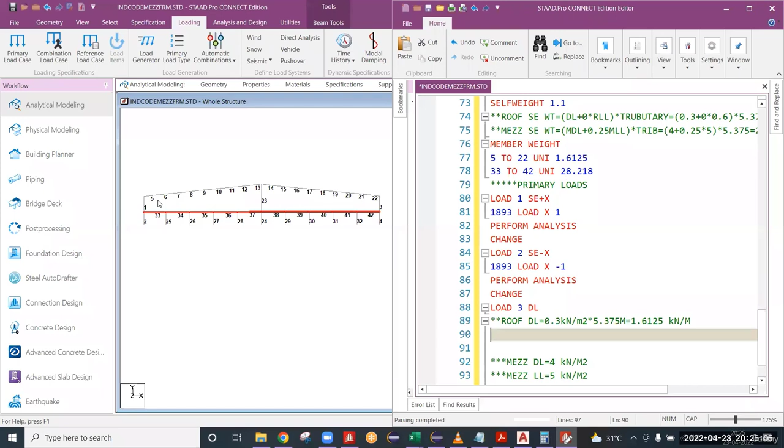From members 5 to 22. Roof dead load means you have to apply it on the rafter, right? 5 to 22. Before applying it to the rafter, under which load it will come? Member load. Member load from 5 to 22. Which type of load it is? Uniform load. In which direction? Gravity, downwards, right? So global Y direction, negative. Negative means downward direction. Minus 1.6125. Clear?

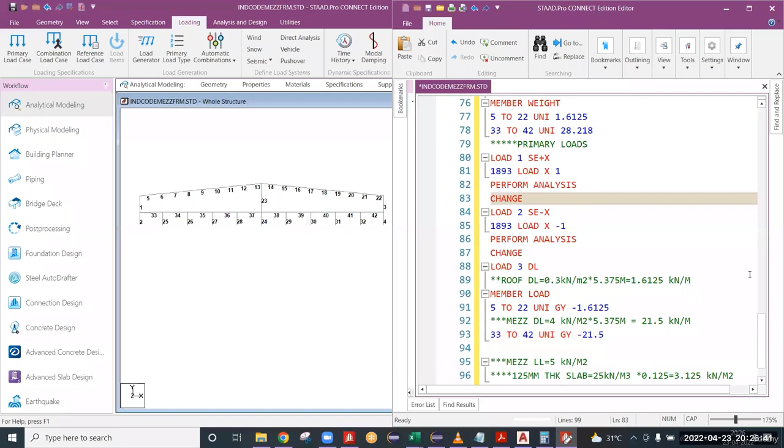Now I'm taking mezzanine dead load. Mezzanine dead load I have is 4 kilonewton per meter square into 5.375 meters tributary. So what is the intensity of UDL? 4 into 5.375, that is 21.5 kilonewton per meter. So from where it has to be applied? From member 33 to 42, uniform load, global Y direction, negative means downwards, 21.5. So the dead load application has been completed. For your understanding, I am doing like this.

So the next load 4 is live load. Roof live load. In our example, what is the value? 0.6. So 0.6 into tributary 5.375, that is 3.225 kilonewton per meter. So where it has to be applied? On the rafter, because it is roof live load. So therefore it has to be applied in the roof, that is rafter, 5 to

Can anyone tell me what I have missed here? Intentionally, I have missed one line. Member load. Yeah, exactly, member load. Some members will get a doubt: already, sir, we have used member load here, will it be applicable to this one? No. Why not? Because you have created a fresh load case here. This member load command will be ended there, because you have created a fresh load case. That is why you need to create member load again.

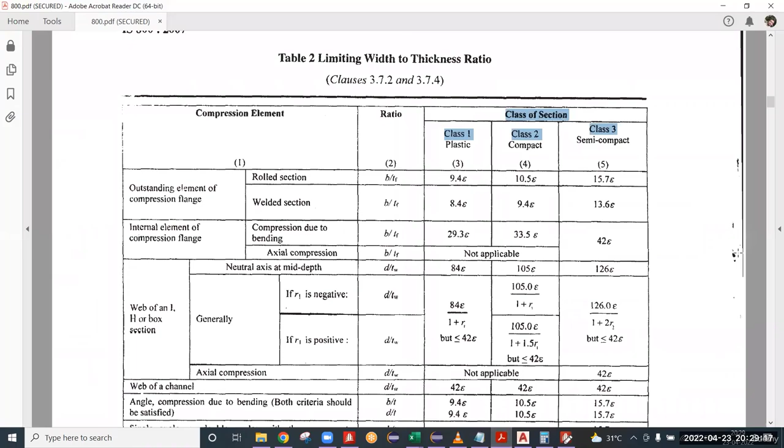So 1.5 is for leading and 1.05 is for accompanying. So which one is critical? 1.5 is the critical. Most of the companies will follow only the critical one, 1.5. That is why I am going to take roof live load and mezzanine live load in only one case, and provide factor only 1.5. That is why I'm taking mezzanine live load in this case only. I'm taking the critical for both. Clear?

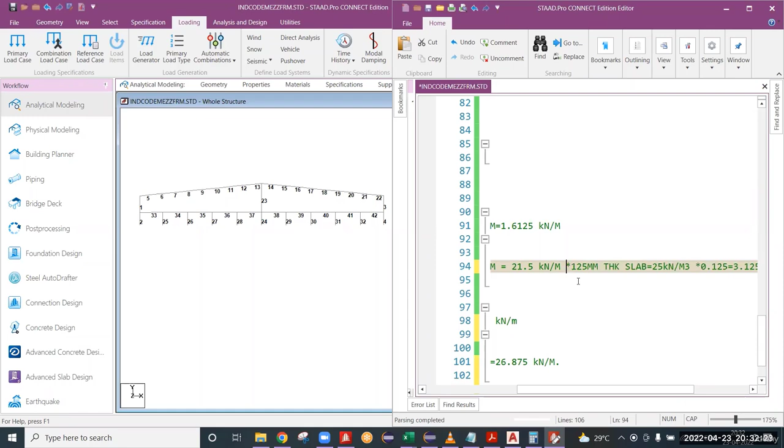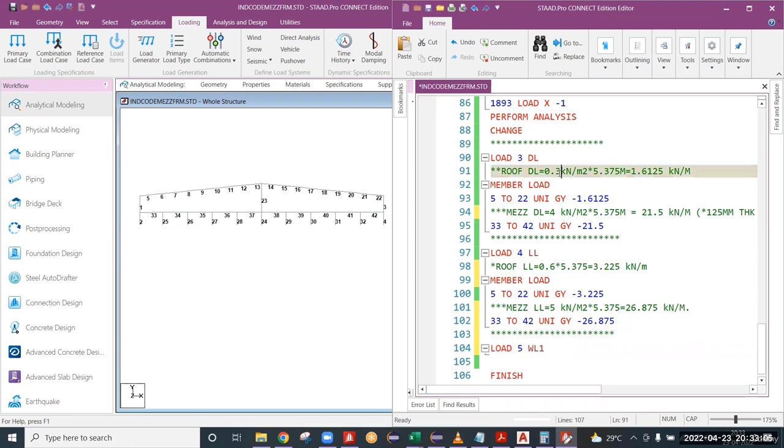Till here, do you guys have any doubts? No. So clear. And the next load you have to apply is load 5, wind, or you can say wind load WL1. Okay, because there is no collateral load option in the IS code. Whatever collateral load comes, that comes under additional dead load, which is included in the dead load itself.

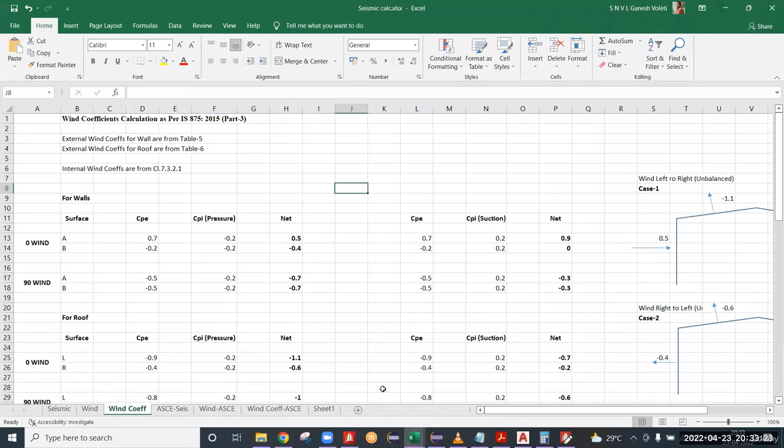So the next thing you are going to give is wind load 1, and there are 6 wind loads as we have discussed. If you have practiced, you will get to know the wind coefficients. So I think you guys are going through the recordings also, right? Have you gone through the recordings? Yes, sir, we are going to.

So this is the internal pressure coefficient, which is for openings less than 5%. And if you have openings about 5 to 20%, the internal pressure coefficient will be 0.5 instead of 0.2. And if you have more than 20% openings in a wall, you will get an internal coefficient of about, I think, 0.7.

So 0.2 is less than 5% openings, 0.5 is 5 to 20% openings, and 0.7 is more than 20% openings. Like that, the Indian code provides some provisions. So if you guys go through all these things and practice, you'll get it.

I'm stopping today's session here. I'm just deleting this note. So I want to give you this file, whatever STAAD file I have done. Could you please do it yourself? Can I expect that? Can you complete it? Yes, sir. Better, right? Yes, sir. So I will provide it.

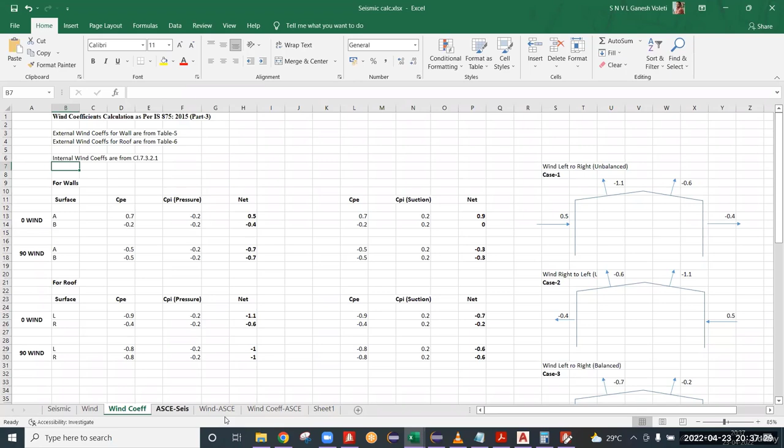So if you want, I will give you what I have done, the American code file, this sheet and this partial file. I have not completed this file. I'll give these files also. Clear? Just try to do things, and we'll see in the next class. I'm going to share all these files with you. Just try to do it on your own. If not, then we'll see in the next class.